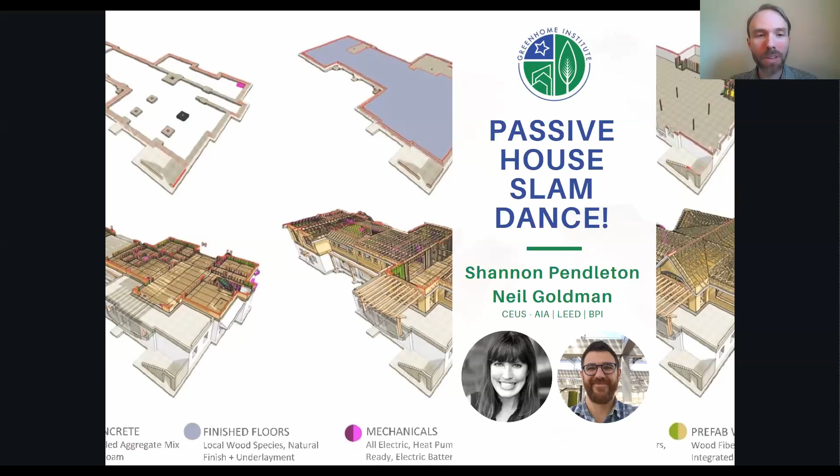Thank you so much for the introduction, Brett, and the opportunity to be here. I'm going to share my screen and get us started. Let me know if you can see that all right. Yep. Great, thank you. So, looks like my window moved.

There we go. I'm Shannon Pendleton, and I lead Passive House projects at Sanderson Sustainable Design in New Hope, PA. I'm excited to be here with Neil Goldman of Less Energy in Philadelphia, to talk about Passive House. We've both worked in this space in different roles for a long time. Currently, I do design, project management, owner's rep, and consultation. I'm an online host with Passive House Accelerators Construction Tech and the in-house Passive House consultant at Source 2050's High Performance Marketplace. I also volunteer a lot, which is a great way to get involved, most notably with Green Building United in Philadelphia, which is where Neil and I met. I'm also a proud GHI member.

So Neil has an amazing path too. Neil, you were at Kitchen and Associates when we met, is that right? Yeah, that was a while ago, but I was a HERS rater for Kitchen Associates, a larger architecture firm focused on affordable housing. So yeah, I did a lot of multifamily housing projects there.

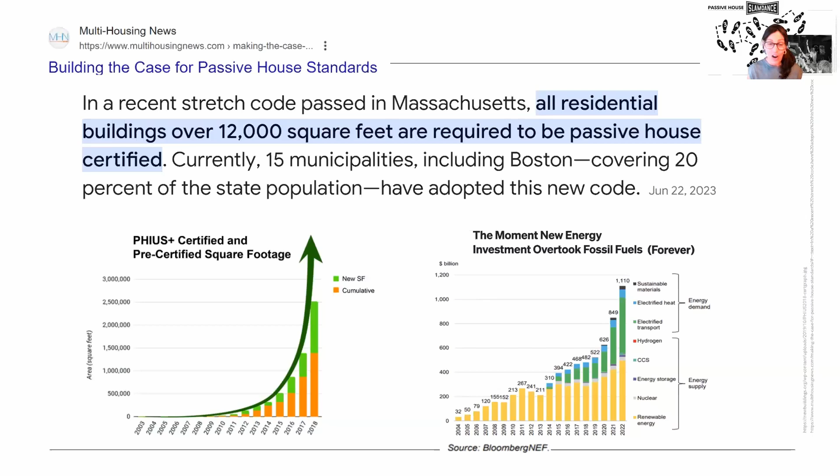Second, it helps to share that globally, passive house is either at the top of a step code on the path to zero energy, or at the base code on the path to zero carbon. Globally, there's over 12,000 certified projects and over 120,000 projects using the principles.

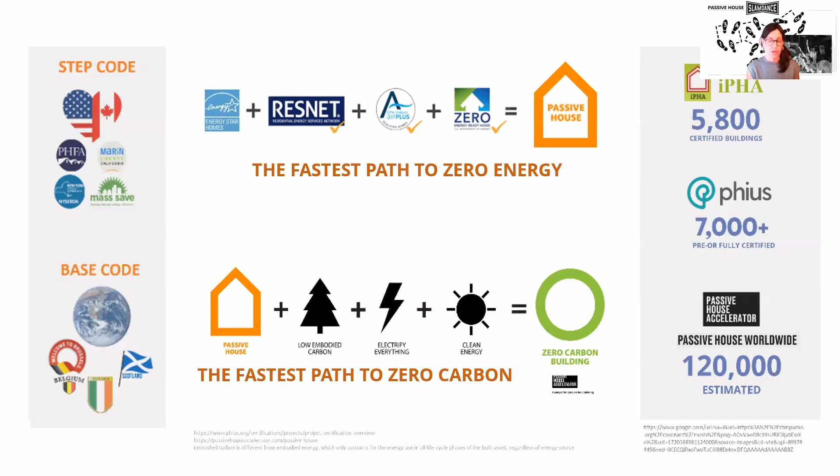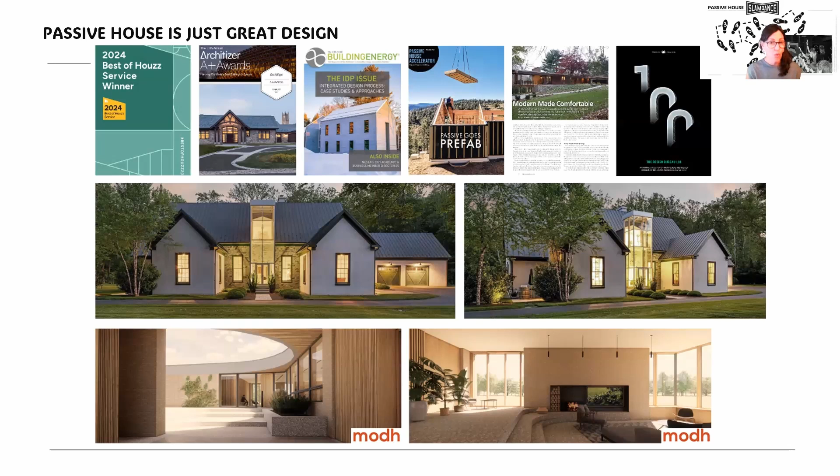But the most compelling thing you can do is show how passive house is just great design. In all of our work, our projects either use the principles or push for certification, or both. Any project can be a passive house, whether it's a retrofit, new construction, residential, commercial, high-rise, multifamily, or single family.

And if you're going to certify, you can do that with PHIUS, which is Passive House Institute US, or PHI, which is Passive House Institute. But both certifications really use 5 simple principles to yield 12 benefits and gain 70 to 90% less energy use, with a proven return on investment.

So we really like to focus on the health, safety, and welfare, and how passive house has the best indoor air quality and comfort of any building out there. It's very asthma friendly. It's noise canceling, so New Yorkers love it because it keeps the honking cars out. It's free of dust, bugs, drafts, and moisture.

It's all electric and off-grid friendly, and in many cases it's been proven to be wildfire smoke resistant. So when you're offering passive house to your clients, first figure out what they value and why passive house delivers that better than any other methodology or certification.

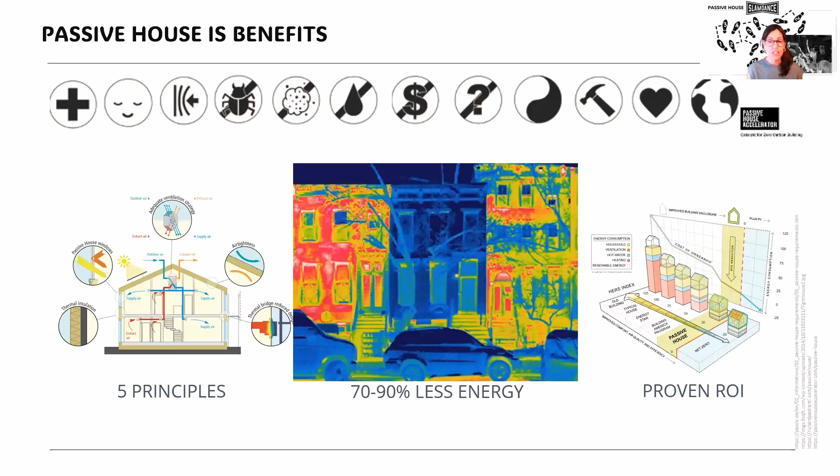As Michael Ingui of Passive House Accelerator says, nobody ever wants the house with the dust and the bugs and the drafts and the moisture. So that image in blue in the center of this slide is not a vacant building - it's a passive house seen through an infrared camera in winter, next to the ones that are letting all of the heat out.

Best of all, passive house focuses on how excellence is measured. It's not the architect or builder saying it's great - it's a third-party rater or verifier proving how the work measures up. So it's your client's best guarantee and insurance that they are going to get what they pay for.

So when you think about modeling your workflow and your proposal, think about it as a waltz. You're going to go through rounds of review with your team and the certification body as the project marches forward. Share and track your scope of work at every meeting, so your whole team knows what to expect and when to lead and when they're expected to follow or review.

Ideally, for certification, you'll register the project during schematic design, receive pre-certification on that design at the end of design development, and go for final certification during construction documentation and administration.

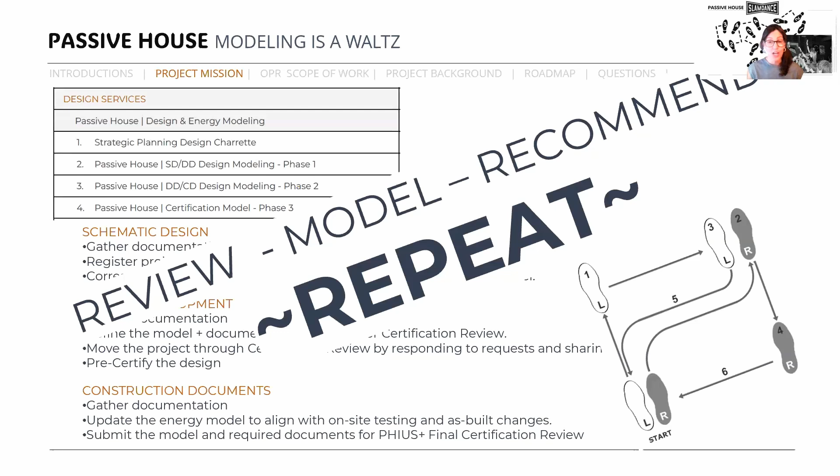Also, let your client know that other team members may be needed because Passive House is a team sport. At the very least, make sure your team has a CPHC or Passive House designer, a verifier, and a mechanical engineer. Often, if you're doing a residential project, you might not have a mechanical engineer, but you're going to need one if you do Passive House.

If your owner has a builder, ask them to include pre-construction services in that builder's scope of work so that they can get paid to join the design meetings. They are going to be critical for your sequencing conversations and in understanding what materials you want to specify.

Plan a great kickoff meeting and get everyone on your team to attend. During that kickoff, do introductions, review the project mission, all the Passive House requirements, your scope of work, and review the project documents you have to date. Share your initial design recommendations on the form factor and orientation. It also helps to have a roadmap and a schedule, share some similar case studies, and take questions.

We find our best practice is to pair an experienced member on the team with a newbie, either internally in your office or as a requirement of the RFP for professionals you want to add to the team. We also find that sweet spot for hosting that kickoff meeting is right at the end of schematic design.

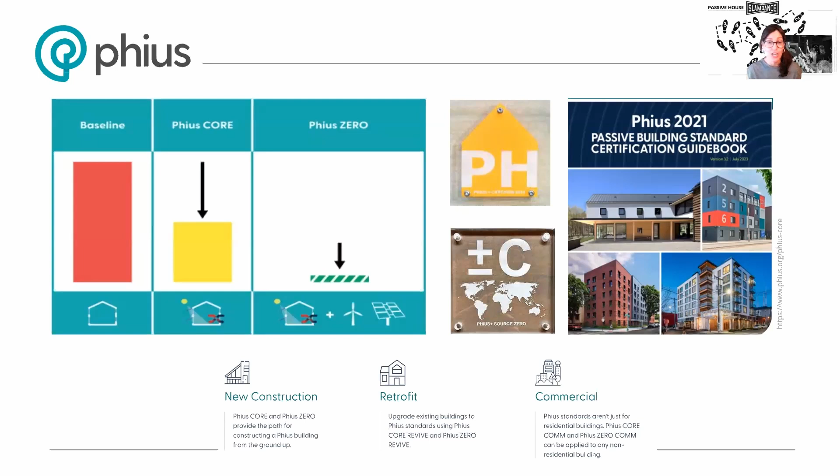We certify with PHIUS. They have two paths for certifying, Core and PHIUS Zero, and both of those lead to optimal results. For PHIUS Core, it's typically new construction, and it can follow either a prescriptive or a performance path. For PHIUS Zero, they combine Core's passive conservation limits on space conditioning, then add active conservation source energy targets for the user loads, like lighting, appliances, and mechanical systems. Then they add a layer of requirement for renewable energy, whether that's on-site or off-site generation, or sourcing your renewable energy from renewable resources.

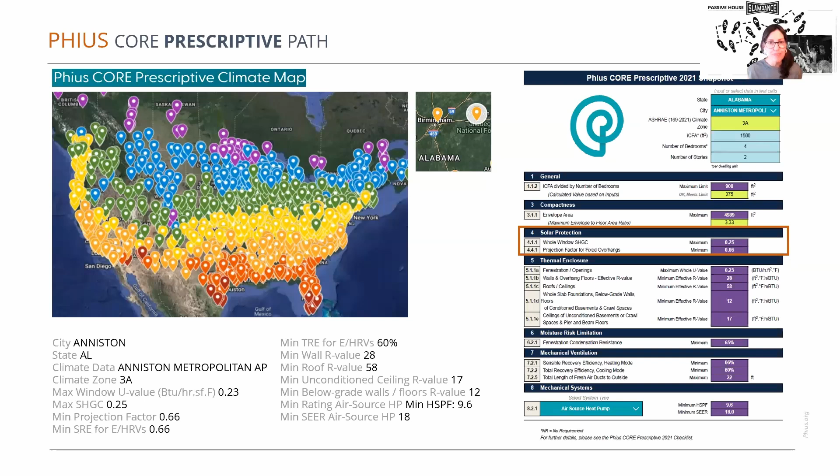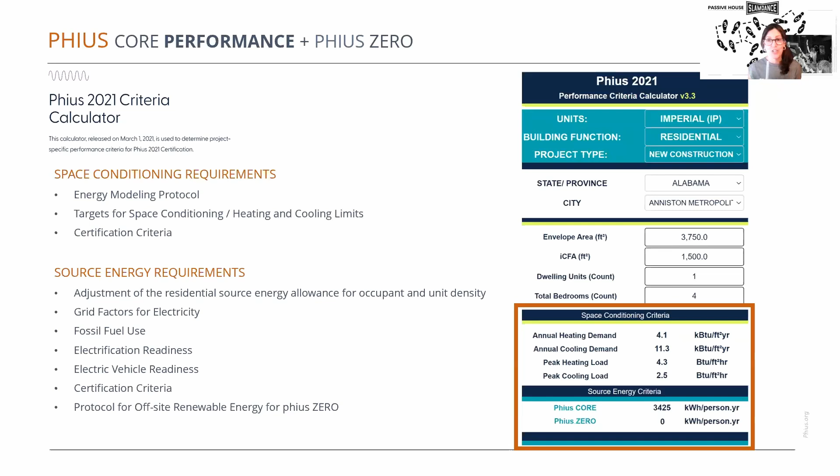For the core prescriptive path, it's pretty simple: you use PHIUS's climate map and calculators, and you set targets for R-values and system efficiencies. For the performance path, you chart a path to be renewable with the core limits on heating and cooling demands and peak loads, or you level up to PHIUS Zero. You can choose which one of those to hit with your team as you go through the process, and then get that net energy use on an annual basis.

So real quickly, we're going to jump into a couple case studies, and we can look at these more in depth later. But first, we're going to look at a project named Silver Green. It's a completed multifamily project, it was prefabricated, and it achieved Source Zero Passive House through PHIUS.

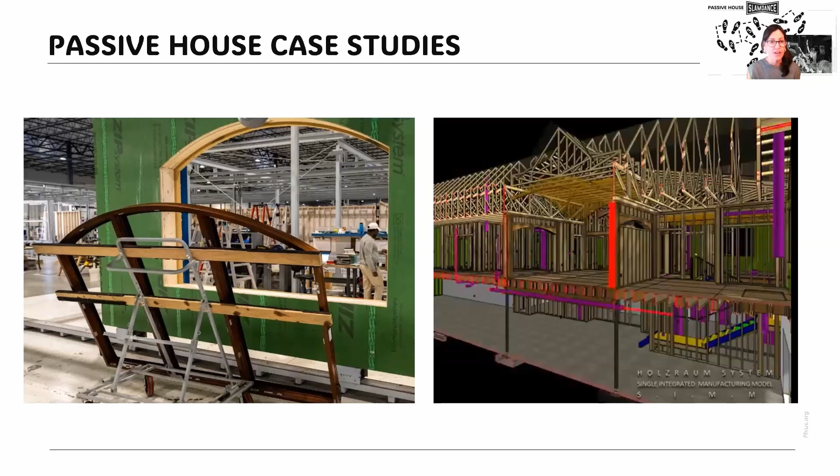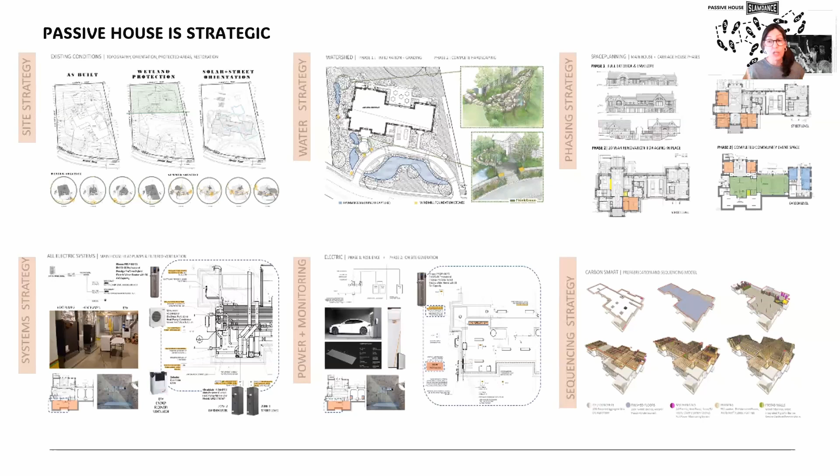Our client had multiple future goals that we had to make specific. So we started with narratives from all the team members and then put numeric targets on those narratives to measure our success. Some of the client goals included how to swap out systems in the future without damaging the passive house envelope, how to prepare for community solar, and a planned renovation after 20 years of occupancy to create an event space for the community. Those are just a few of the goals—there were many.

But we worked through all the assemblies and transitions in the envelope on the exterior.

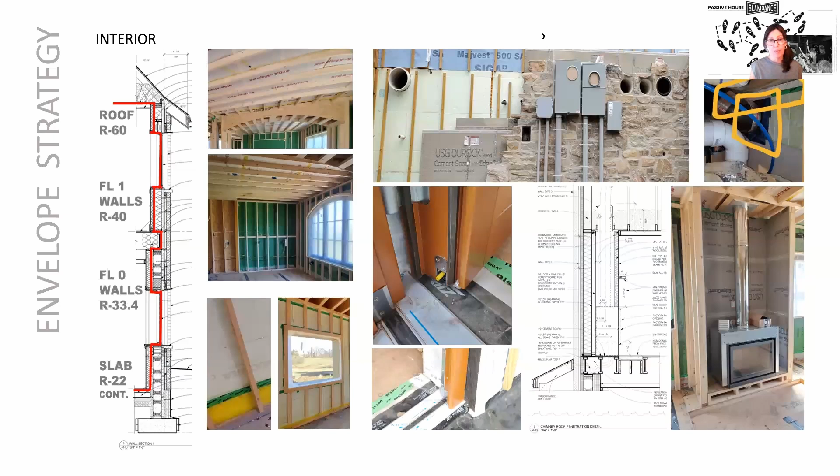We worked through all the assemblies and transitions in the envelope on the exterior, which included a full stone veneer and wood fiber insulation. And then on the interior, how those parts would go together, which included two airtight wood burning fireplaces, which required dedicated air intakes and exhausts in order to isolate them from the balanced airflows for heating, cooling, and ventilation on the passive house envelope.

So always review your air barrier strategy and any thermal bridges that you think you might run into in your building envelope. Put little circles around that full building section and say, hey, these look like they might pose a moisture risk. Let's talk about them and see if we can mitigate them.

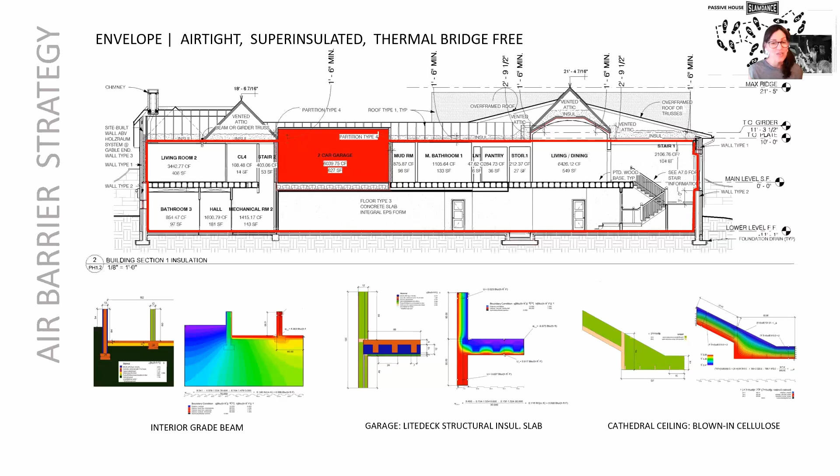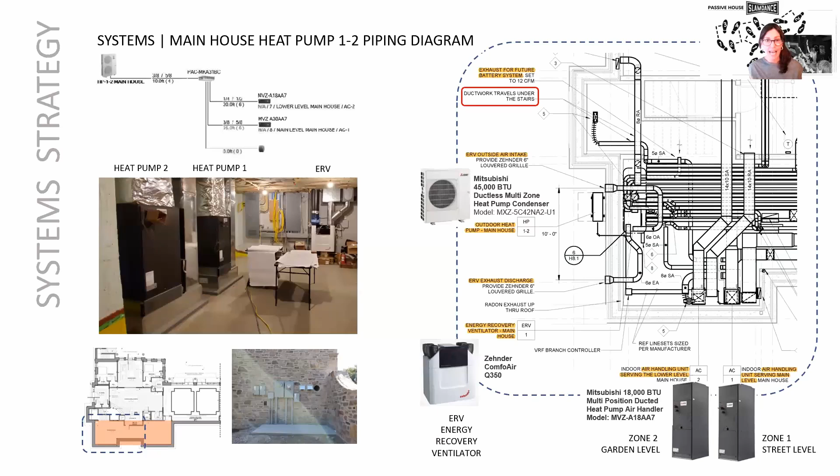As soon as your geometry is set, create a systems diagram. And if available, model those systems in 3D so that you can clash detect your ductwork. Always use gasketed penetrations if you can for easy future swap outs.

And have a power strategy for your current power and your future on-site generation. If you can, invest a few pennies to run conduit to your property lines, not just your roof and your shutoffs, for future solar. Then you can also be future-proofed for maybe community solar. So while you're digging up the earth, while you're building everything, it's just pennies on the dollar to run that conduit. And it makes it very easy to upgrade in the future without having to do any demolition.

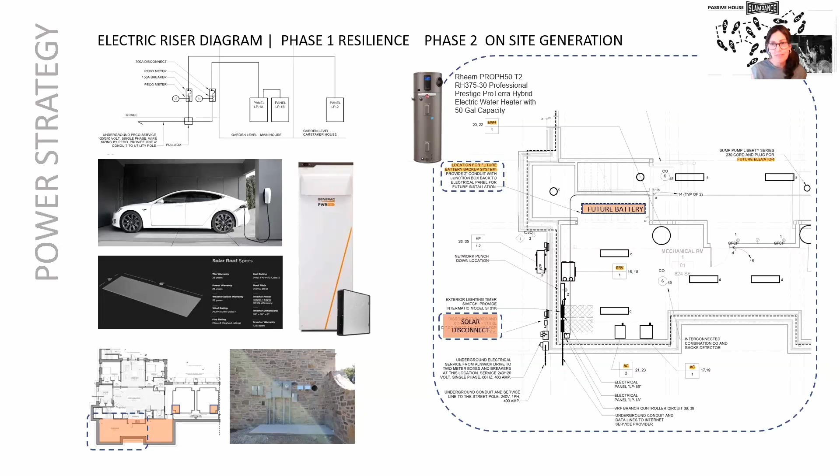The next case study I want to look at is called Kibunjah. It's a project Neil and I are working on together, and it's still under design. It's looking to achieve PHIUS Core or Source Zero Passive House certification.

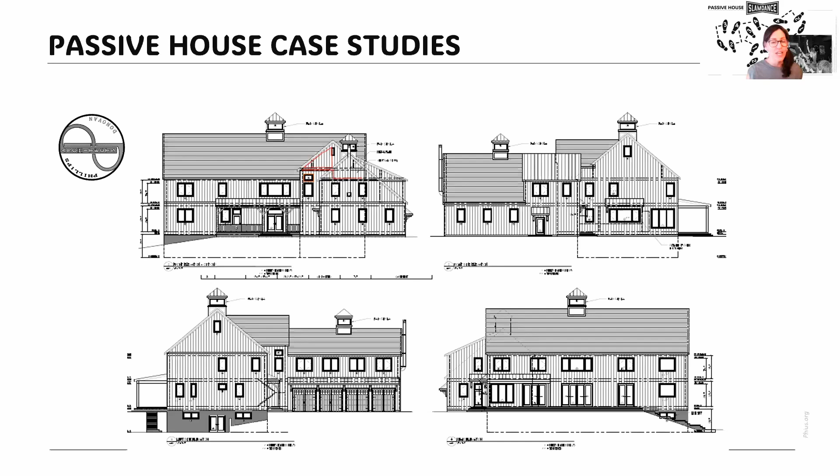So this is where we defined the climate set first. We picked our climate and looked at the orientation and site. We did an initial WUFI model with the design as is in schematic design.

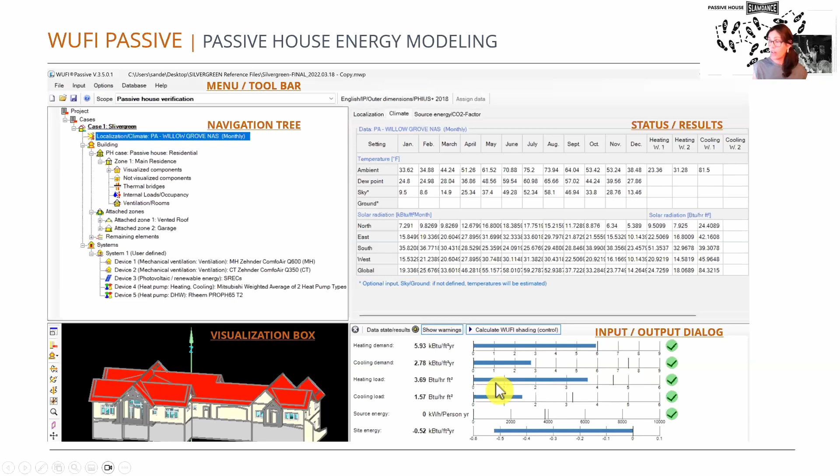And this was another little area where they had an outdoor balcony that was eroded from the form. So we said, hey, we think we can add square footage, reduce cost, and improve efficiency. So how about bringing these form areas out to the face of the facade?

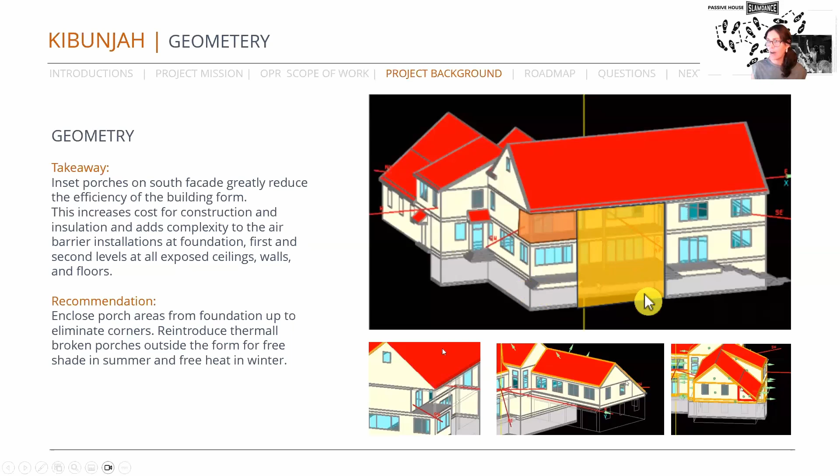And then we also showed how far we are just from PHIUS core, based on our source energy criteria. In our first model, we were about 5,600 kilowatt hours per person per year. In our second model, we brought that down to about 8 when it came time to deliver. That equates to about 15 400 watt solar panels. And if we wanted to go for zero, about 60 400 watt panels.

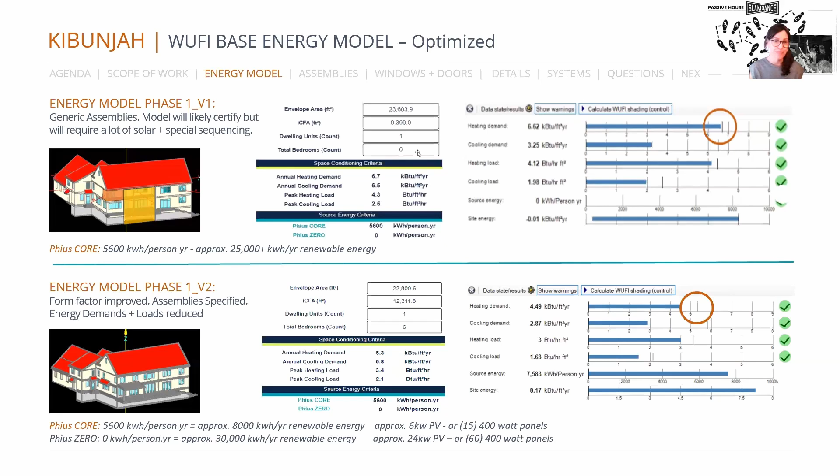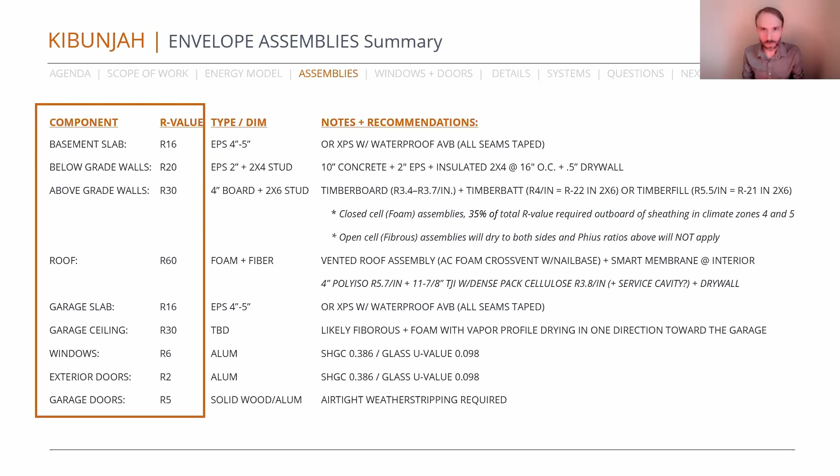Now, Shannon, do you see a benefit here? It looks like you've got some buffer built in, right? So you're going further below the requirements of the model. Is there a benefit to doing that, in the sense that perhaps you get through construction and it didn't shake out the way you hoped, something was a little less efficient? We hope the builders are going to do a great job and build it better, but we all know sometimes there's a deficiency. Is it good to have a buffer so that if there is a deficiency, you still make it? Is that part of the thinking too?

Absolutely. And I have never seen a project that went exactly as planned. You may meet your schedule, you may meet your budget, you may go under or over, but it will always be different than you planned. The Suez Canal gets blocked, your materials can't show up, you've got to substitute. Okay, what are you going to use? How thick is it going to be? And what's it going to do to your energy model?

So building in buffer, and telling the team where you're building in buffer while you're doing that energy modeling, is great, because it helps them understand, hey, if we have to squeeze the mechanicals because we can't afford them and use a lesser mechanical system, then our windows are going to protect us in this area. Everywhere you add buffer, you decrease the need somewhere else. And everywhere you increase the need somewhere else, you pull from the buffer. So it's like a big seesaw where this whole building system operates together in tandem.

So this is a quick summary of the envelope assemblies that we recommended. Initially, in orange here, we just recommended target R values with our base model. And then when we got more specific and started to build those assemblies out and layer them, and derate them for any structure that might be moving through the continuous insulation, et cetera, we put dimensions on them. And we started to name names and name materials so we could understand our vapor profile.

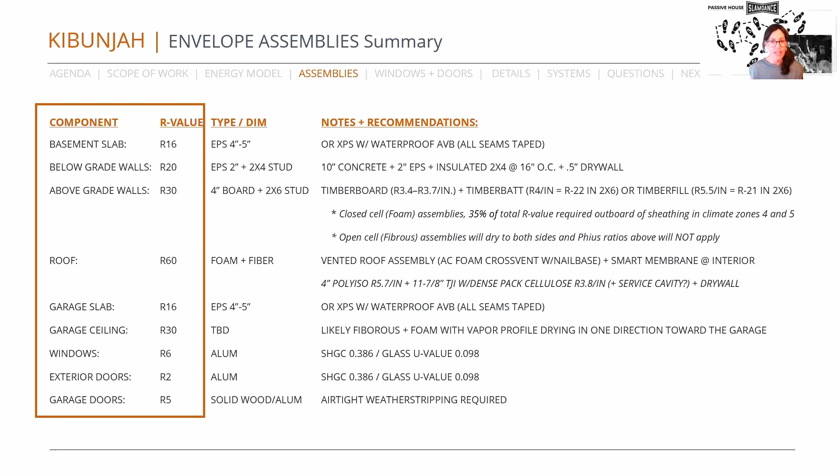Is our assembly going to dry out to both sides and be bidirectionally vapor open? Or is it only going to be able to dry out to one side because we're using a closed cell foam? And what does that do to certification? What rules will we have to follow if we go to a single vapor profile and we only dry out to one side? And have those discussions, because ultimately you want your team, when they leave this project, to do this again and feel comfortable knowing why they did what they did and how to go forward.

So for instance, on this project, here's a great example of highlighting that WUFI model on the slab, what that assembly looks like, what it looks like graphically in the model, and some of the product recommendations that we made for EPS, XPS foams, and air barriers below those, above that insulation, and below the slab.

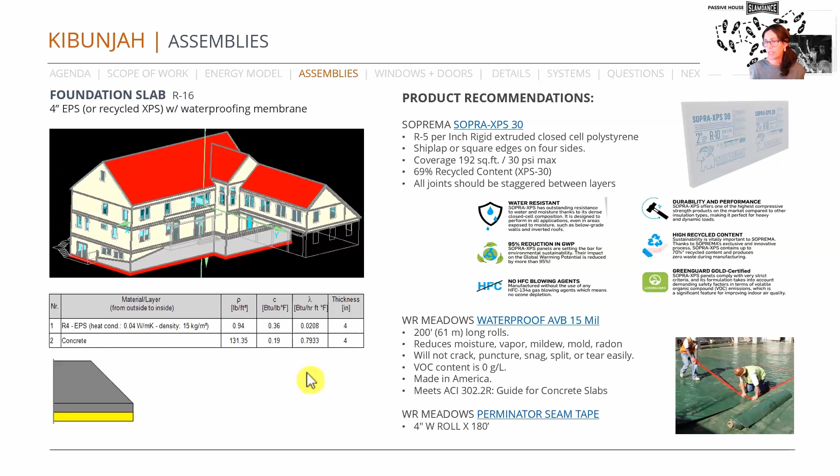That climate-friendly XPS and that mineral wool insulation on the interior of the slab, on the walls below grade, same kind of story.

So if you want to be vague and not name names, you can do that. But if you've got your builder on board, they usually have a supplier and they want to talk about that. So don't be afraid to have those conversations if they're appropriate. And don't be afraid to be general and just give target dimensions and R values and allow the builder to find those materials.

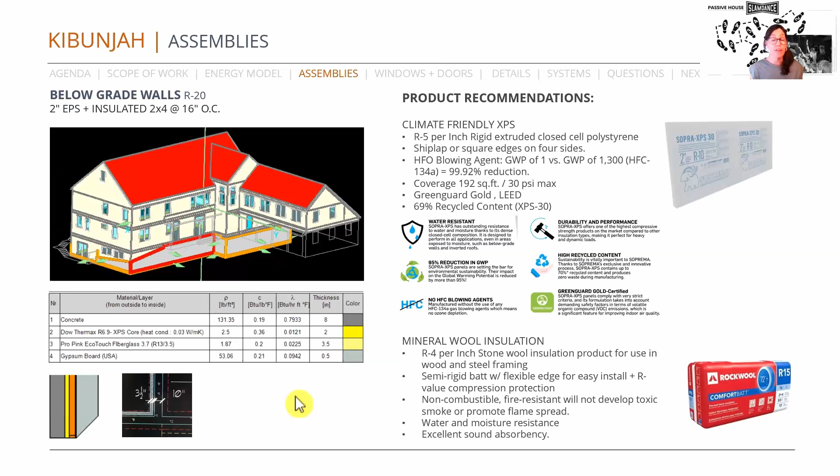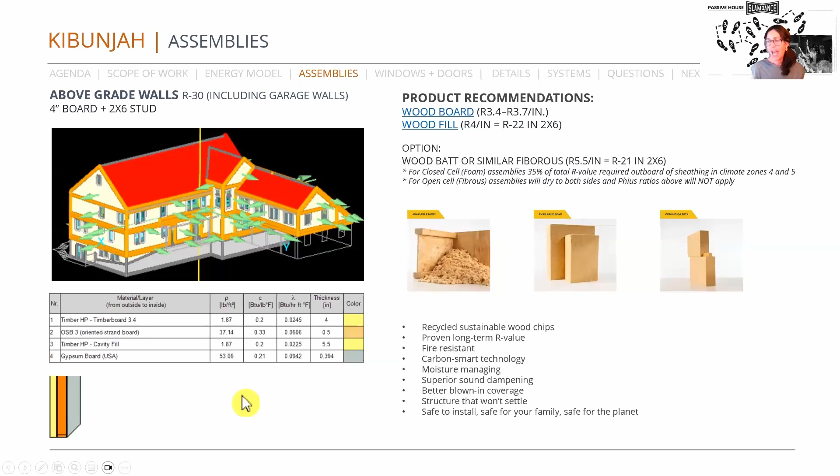For above grade walls, we looked at going bidirectionally vapor open and using wood fiber wherever possible. So we have a wood board, a wood fill, and the option for wood batt insulation in our assembly. And we're talking about long-term R value, fire resistance, carbon smart technologies, moisture management, sound dampening, and how insulation might settle in the structure, and where that might be okay in some assemblies and where it's not okay in others. And how much nicer it is to install a product like that.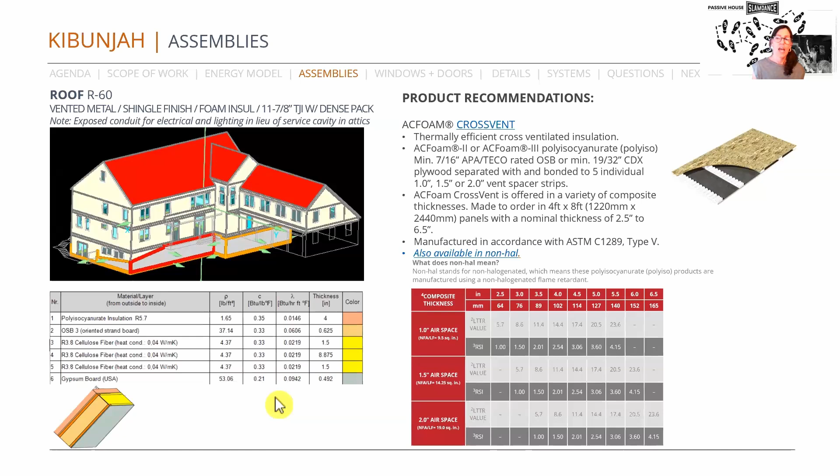For the roof, I should have highlighted it on this one, but you do see the assembly is shown here, and we're using a vented roof assembly. We talked about whether we wanted to use a vented or unvented assembly, and how a vented assembly would increase the warranty on the products.

For the windows and doors, we ran through 3 different manufacturers and talked about which ones might be more appropriate than others. We always like to use a pre-certified window unit because all the metrics are available for what we need in the model, like the U value of the mounted window, the frame factor, the U value of the glass alone, any solar heat gain coefficient to prevent overheating, or any shading needed on certain elevations at different times of year.

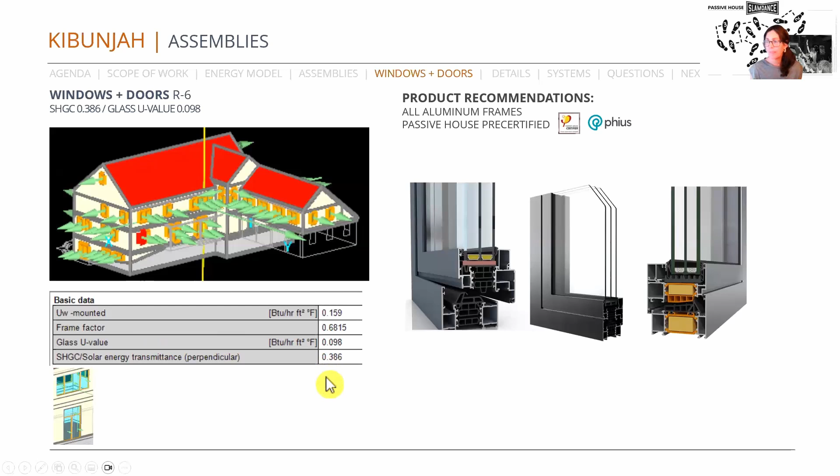Same goes for heating, cooling, and ventilation. We have a strategy. We block out what zones we're going to have, where we're going to put our mechanical rooms, and what kind of equipment we want to look at.

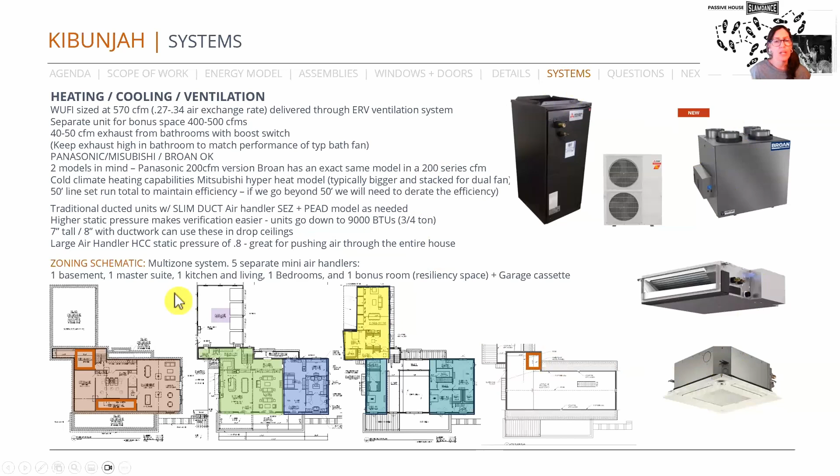For hot water, same story. Pick your appliances, talk about how you're going to do the layouts. For this house, it's a really big house. We talked about distributing vertically in 2 areas with 2 different zones and tying those together with a horizontal pipe with a shutoff, so that if one system goes down, you can open that valve, serve the whole house while you repair the system that's down, and not lose any functionality.

That was a great tip I got from a friend, Steve Baczek, on the Build Show. And everybody went, yeah, that's a great idea.

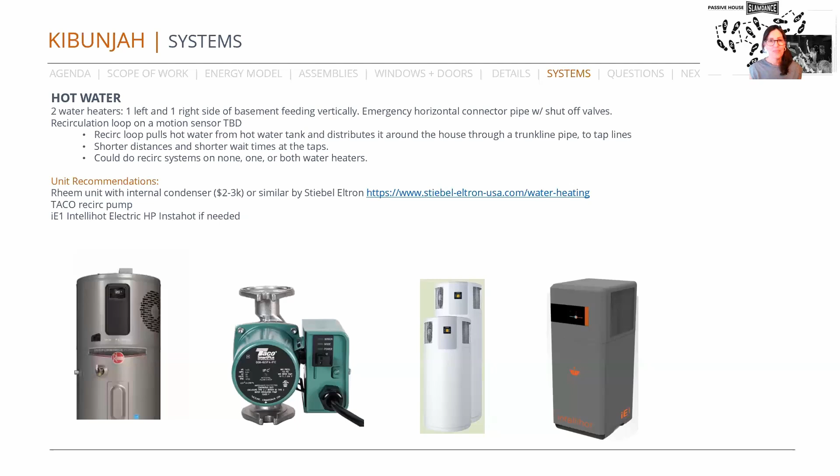Let's do that. So speaking of which, passive house is way better with friends. So have a buddy system. Don't be the only sole person on your team. Make sure you pair experience with someone new so that you get there faster, and share what you're doing in your community, volunteer, get involved and meet other people who are interested in what you're interested in.

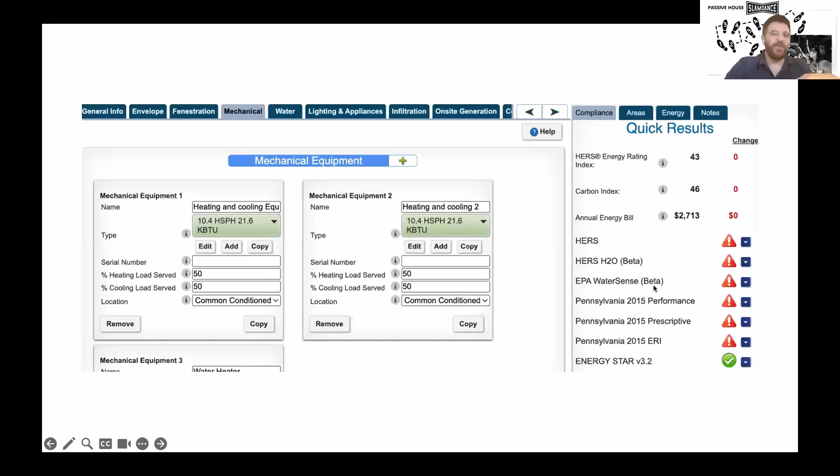This is what the HERS rating energy modeling software looks like. This is a screenshot from Ekotrope. So you could see there's all kinds of mechanical inputs up at the top. There's envelope and fenestration - all that information goes in here, and then it spits out the information about the energy bill, and then all of the compliance for a specific project.

So Passive House has a lot of individual requirements that you've heard of, and they also have a lot of requirements that come from other programs. So you can see on this tree, and this is from the Passive House website, Passive House, as you go up this tree, incorporates all of the programs below it. So, you know, if you're going to get Energy Star certified, you're definitely going to have code compliance, right? And you can see the HERS score here. Quickly, a HERS score - 100 is typically around code, and 0 is net zero. So as the score goes down, you're using less energy.

Energy Star is sort of the baseline program. There's a lot of requirements - 5 pages of checklist requirements, and a lot goes into that. It's a great basis for starting your energy efficiency path.

Indoor Air Plus adds a lot of requirements for a healthy home. As your home gets more and more airtight, they want to make sure that there's less pollutants and less risk in the home. So Indoor Air Plus is a lot about the environment inside the house. And then Zero Energy Ready - you need to get Indoor Air Plus and Energy Star certified, and they add a certain amount of requirements on top of that.

And then we go into PHIUS, which requires that you get Zero Energy Ready certified, which kind of goes down the line. As you can see, this is a screenshot from the quality assurance workbook for PHIUS. On the right here, you can see where all these different requirements are coming from. So Energy Star requires 50 CFM intermittent air, but Passive House requires that you supply fresh air from the ERV to all bedrooms, which Energy Star does not. This goes throughout the quality assurance workbook, and there are many requirements from all the different programs.

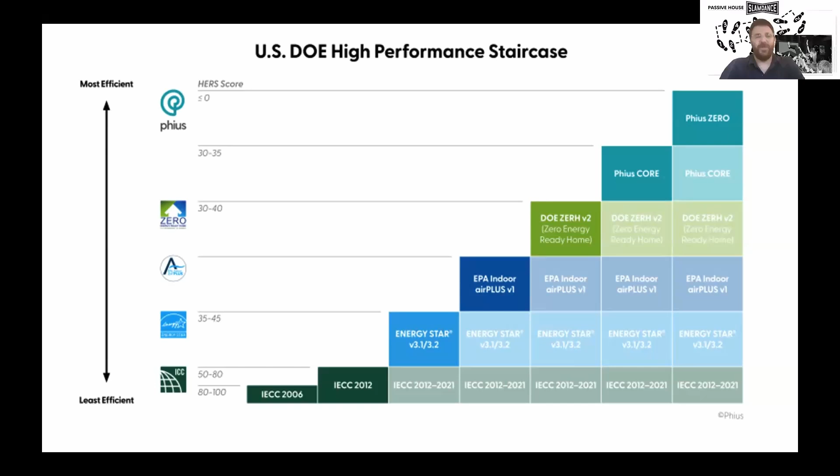Right, thanks, I hope that helped. So we talked briefly about this, but this goes throughout the entire PHIUS certification. Every piece of it sort of builds from different programs.

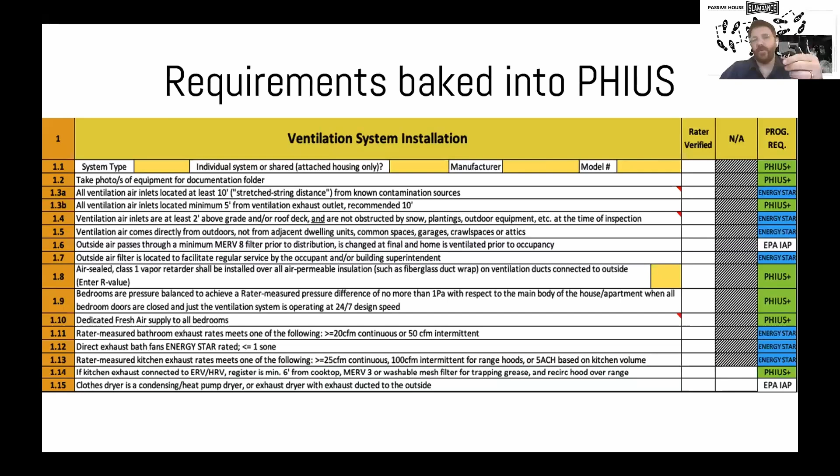Okay, so Indoor airPLUS is not a program a lot of people are familiar with. Indoor air quality, the Indoor airPLUS certification, has a big section on moisture control. They're very concerned that once you have an airtight house, you don't want any mold risk. So they make sure that you are flashing your roof connections properly, that you're flashing your window connections to the wall properly, that you're connecting the ground to kick-out flashing at the bottom where the two different materials may meet. They want to make sure the drainage plane of the house is complete, thought about, and working properly, so that the gutters drain away from the house and there's no chance of picking up bulk water from anywhere.

If you're in an area that is a radon zone higher than 1, it's interesting, in Pennsylvania, in Philadelphia, there's no radon requirement, but anywhere outside of Philadelphia, you immediately have to do radon mitigation. So we're used to this, and you either have to pull radon from under the slab, or have a method for getting rid of the radon away from your house if you're in the proper zone.

For HVAC systems, they add a lot of requirements, like you need to seal up the HVAC systems from getting dusty during construction. This is a common requirement in LEED, but this adds this here too. There's ventilation requirements for when you go to commission the house—you need to ventilate it for a certain amount of time. So you want to make sure you look into those requirements. The rater will bring those up in the meetings and during the process, but there are a lot of small requirements that get added with this Indoor airPLUS.

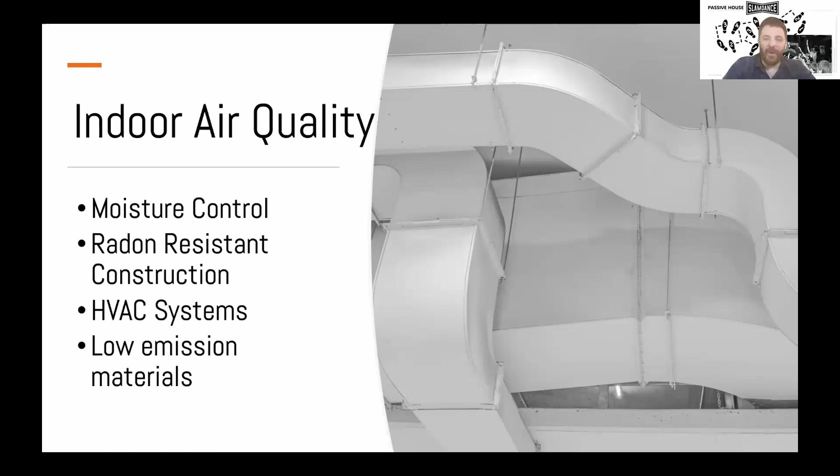The last big section of that is low emission materials. You want to watch out for any formaldehyde in your cabinetry or carpeting or paint and sealants, and they're very specific about which ones can be used. This one's gotten a little easier over time, as a lot of that has become commonplace, but you still want to look out for it.

High efficiency equipment types—there are a lot of different equipment types, right? You can go all electric or fuel burning. As I mentioned before, you could get away with a fuel burning appliance in an Energy Star house. But once you start moving up that ladder and you get more and more efficient, more airtight, and the requirements get tighter, you really need to go all electric.

For heating and cooling systems, there are really 2 types—well, there's only one type, right? There's a heat pump, because you need to do cooling. So heat pumps come in all different shapes and sizes. You can get a vertical or horizontal mounted ducted heat pump that forms and acts a lot like a typical furnace in a house—people are more familiar with this ducted system. And then there's split systems, so non-ducted mini splits.

You typically hear them, and these days there are all different types of split systems. You could have wall mounted, ceiling mounted, floor mounted, radiant floor systems. And then you could have one condenser that supplies 5 heads inside, or you could have one head to one condenser and have a bunch of condensers. So there's a lot that goes into a split system. And then there are electric boilers and heat pump boilers that you could do a hydronic distribution system with in a house. I'll talk a little bit more about that.

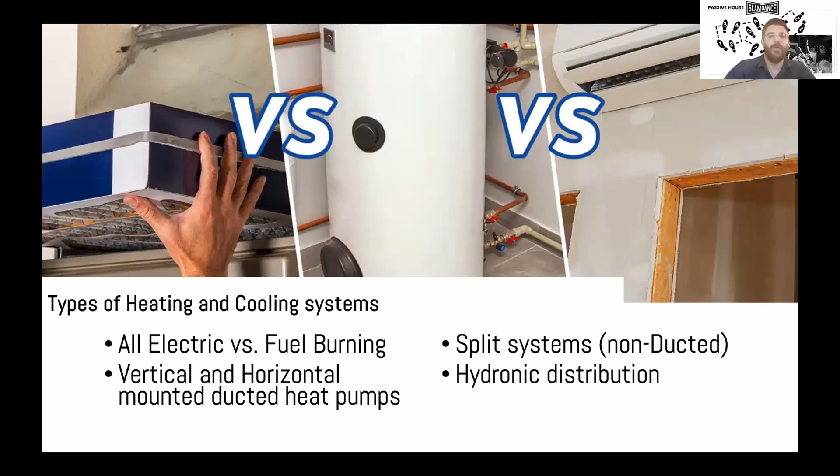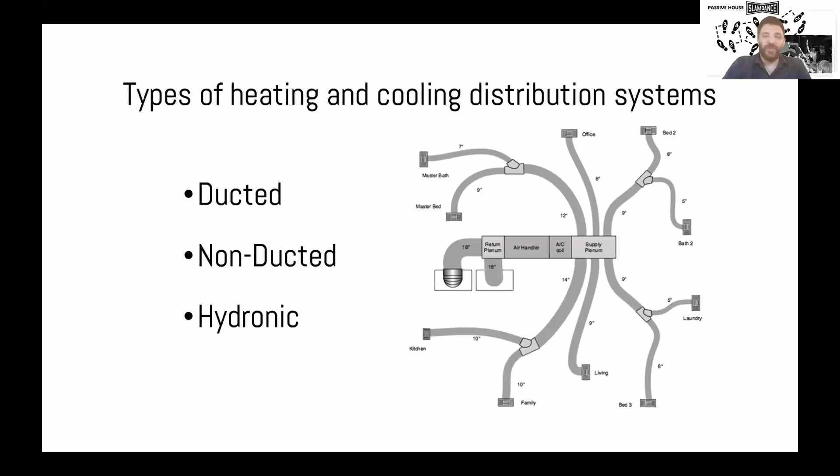You're going to go to a heat pump when you go to a more efficient house. So the decision becomes, are you going to do a ducted, non-ducted, or a hydronic system? There are a lot of pros with a ducted system—it's a centralized system. In a smaller house, you may only have one system, maybe 2. And so you only have one fan and one coil and one refrigerant line to manage.

You don't have to worry as much about leaks. There's typically less filters to change. And this is a lot more common, so you're going to find HVAC contractors that are more familiar with installing ductwork and doing it as common practice.

However, big cons with ductwork—it's large. You need to find and plan for spaces, chases, soffits, all kinds of stuff moving through the building to be able to fit that ductwork in there. A rater has to do the duct testing, and there is a lot that goes into making an airtight duct. If the contractor isn't familiar, they have to do a lot of mastic-ing before they even put the thing up in the air, because they often hide a seam or something. And then I'm going to come and test it, and those requirements are really tight.

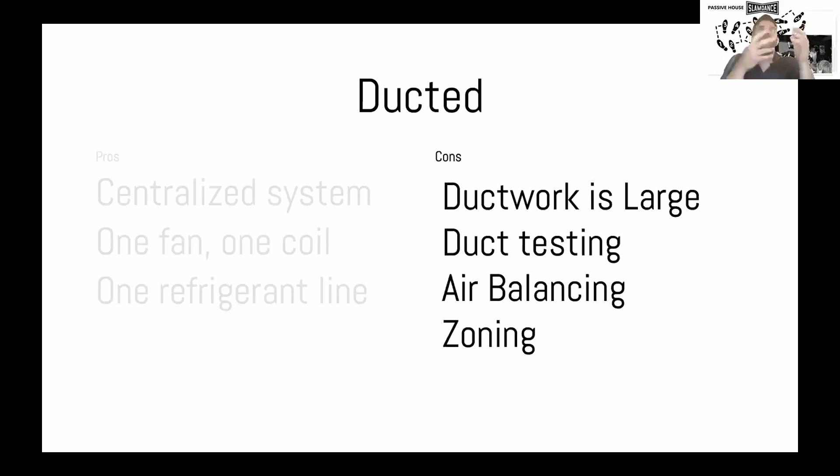That also comes with air balancing, right? Passive house has very tight requirements for supplying air to different rooms. And if the ductwork isn't done well with dampers and designed to be balanced with the right registers or other methods, it becomes very difficult to meet passive house balancing requirements. Ducted systems, while they can be zoned, usually only get zoned like upstairs or downstairs. So there's a little bit of zoning, but it's not as dialed in as a non-ducted system.

So when it comes to a non-ducted system, as I just mentioned zoning, you could put one head in every room and cool just the room you're in while the rest of the house stays warm. So there's a lot of zoning benefits to having individual systems.

Retrofits are great for this because you don't need to run ductwork. As we just said, ductwork is big and there's lots of soffits. You could typically squeeze a refrigerant line, which in some of these systems can be quite small, through an inch wide pipe. That's a big benefit when you don't have a lot of room.

Same idea with those soffits - you don't have to run ductwork, so you don't have to make spaces smaller or take corners for vertical pathways. Much easier to install, right? You can just pop it on the wall. This goes back to the same idea that there's not a lot of ductwork to run.

They're often just mounted on the wall, or in a new construction situation, in the floor system, or sort of looks like a radiator. These can be great for small spaces because a ducted system can only pull back so much - the capacity of it is what it is. Whereas with some of these systems, you could get much smaller capacity into the room and really make sure the capacity for that system is correct.

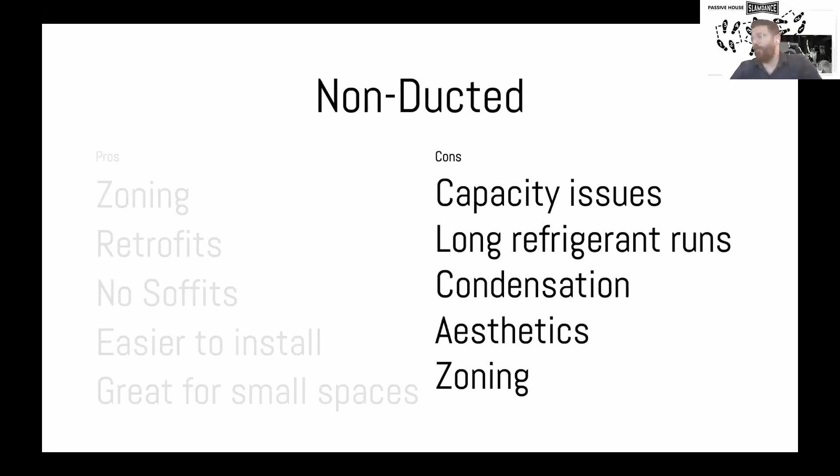Some of the other cons: long refrigerant lines. It's nice to have all these refrigerant lines running where you want without ductwork, but at the same time, more refrigerant lines create more refrigerant, more potential for leaking, and more connections. So that's always a consideration.

These things need to be able to get condensation away from them. So if you need to run a condensation pipe through the wall, or with a pump, it's always a consideration if it's below where the drain is and you need to pump it up, or if it's too long of a run, you may need to run a new drain through the house to deal with the condensation.

There's aesthetics that are a consideration as well. You want to make sure it looks good, and these things are on the wall or in the ceiling and you're always going to see them, whereas a register from ductwork can end up looking much nicer. And I honestly think I made a mistake putting zoning on the end of this, because zoning is definitely a plus for this one.

Yeah, I was wondering about that. But real quick, Neil, two quick questions for you on what you're seeing out there with ducted versus non-ducted. I was just the other day anecdotally looking at a LEED for Homes preliminary plan review rating. They originally had a ducted air source heat pump, and then they switched it to mini splits, and all of a sudden the HERS rating just dropped, right? And for those who don't know, that's a good thing - better HERS rating. So anecdotally, are you seeing large drops when you make switches like that? Are you guiding people on that, or what are you seeing out there?

I don't see people change very often, honestly. That's an interesting point, I wonder if that was rare too. I know, yeah.

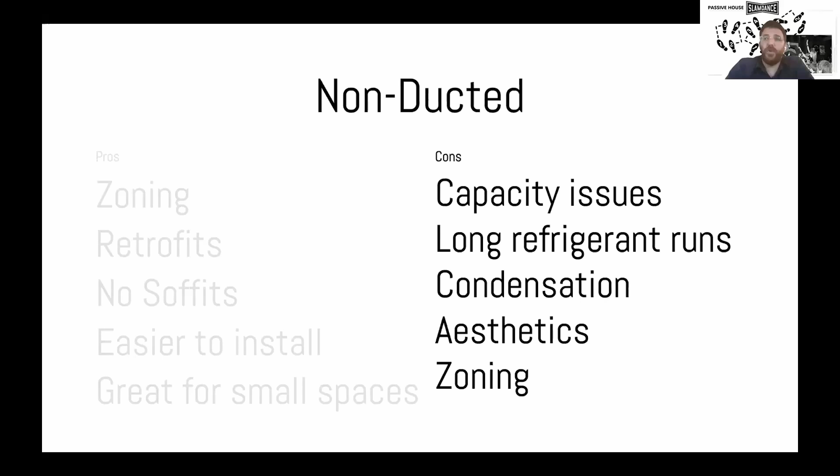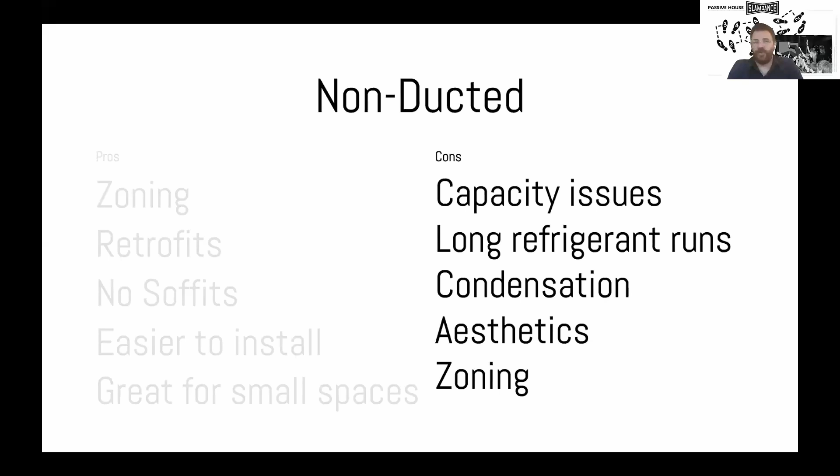I haven't heard that. I think it depends on how you operate your house. It's always a problem when these systems run too short a cycle. When you have a lot of capacity in a small room, it won't run long enough - it's like the short cycle problem, and it won't pull humidity out. I could see that being a problem, if the room's cooling down really quickly but not pulling the humidity out.

There is a hydronic option. You could have an electric heat pump boiler providing warm water running through radiators, radiant floor systems, or even a fan coil system. These systems can be really energy efficient because their delivery system is very efficient. You can combine them with hot water - you could have a tank, or if the load is small enough, use a heat pump hot water heater as your boiler and store it in a different tank and pump it around. No air filters to worry about because it's all coming from the radiant. And plumbers are used to installing boiler systems, so it's an easy thing to find an installer for.

Now I have a question mark after no cooling, because I've heard there are systems coming over from Europe that have cooling in them - a heat pump boiler that could chill the water, deliver it to a fan coil unit that's like a mini split in the room, and cool the room as well. I'd love to see a system like that, but I don't think it's very common. So a big con of this hydronic system is no cooling, and depending on the house, it's tough to retrofit a radiant floor - you'd often need radiators around the house, which take up space and look a little weird.

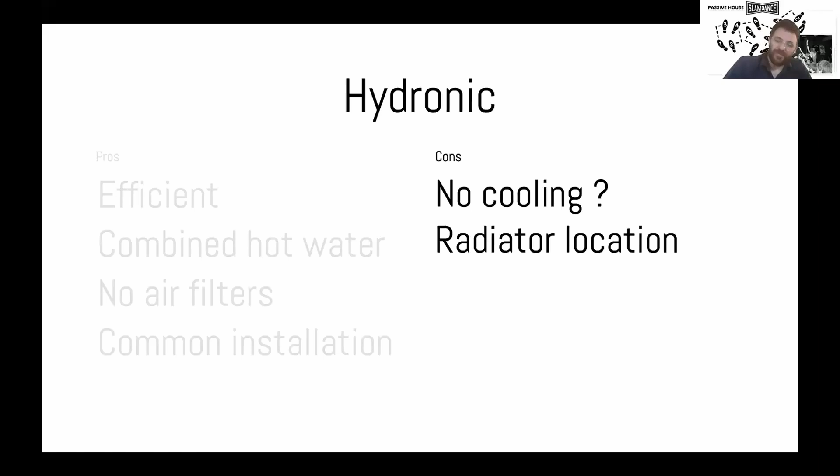I wanted to mention some program requirements that are often a little tricky for people. You need to pressure balance the rooms with respect to the rest of the house - there needs to be a transfer grill from a bedroom, a return grill, or an undercut door. This is always a problem, even with a mini split on the wall, because you're supplying ventilation air to the room, so you're pressurizing it, and you can't over pressurize it.

Make sure you're pulling all your exhaust from kitchens and bathrooms. It's a requirement that intake and exhaust be more than 10 feet apart. This is common but sometimes gets forgotten and is difficult in the field. As suggested, it's great when you do a 3D drawing of all your ductwork - it gets planned out, but often in the field, you're in a mechanical room going out one side of the house with another floor, and it gets difficult. So be careful with that one and plan for it.

Filtration minimum - this seems simple, but you have to make sure the system has a large enough filter to meet the requirement, which is MERV 13, and account for the static pressure loss. The engineer needs to make sure they put the right filter in at the beginning - you can't just switch the filter out at the end.

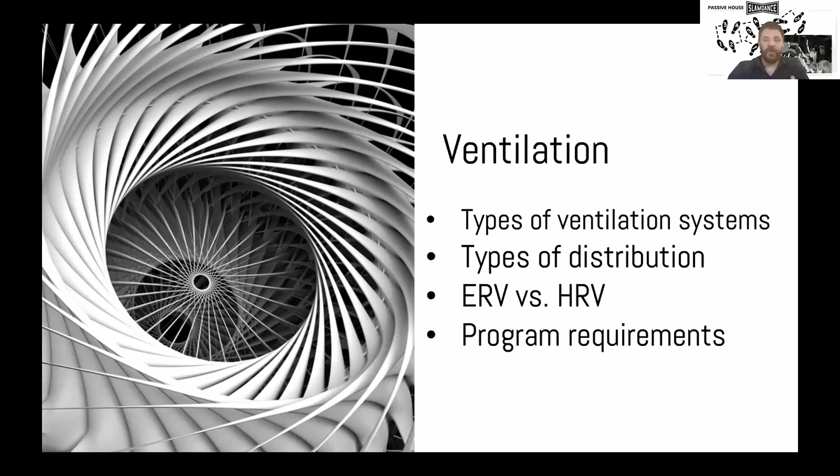I would do the same thing for ventilation, different types of ventilation systems, different types of distribution. ERV versus HRV is always a big one, and then a few more program requirements based on ventilation. So there are 4 types of ventilation.

Exhaust only is very common in the Northeast. Where I am, that's typically how most builders doing an Energy Star project work. This is where they typically have an exhaust fan from the bathroom exhausting air at the right rate so that air is being pulled into the house from that exhaust fan. You get your ventilation. Supply only is better.

It's the same idea. It's often a supply fan pulling air from the outside and dumping it into the return of the system so that air gets conditioned. I wouldn't suggest this typically in a colder climate. This is good in a warmer climate because you don't want to be pulling in cold air from outside, as it could cause condensation problems.

And then what is required for a passive house? Well, natural ventilation is where you are able to open windows and just naturally ventilate the building. This actually goes into the owner's model. You can say the owner naturally ventilates, and it could be included, and it will get modeled that way.

But balanced ventilation is typically how it's required in a passive house. This is where you're bringing in air and exhausting air at the same time so that the air flow is balanced.

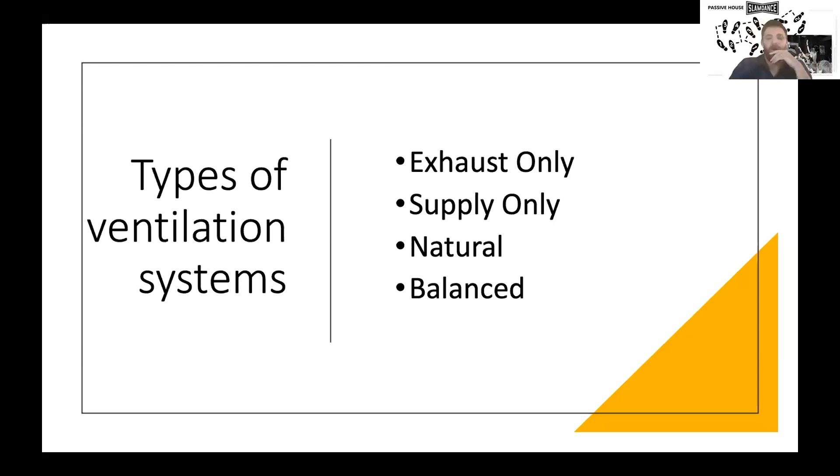Different types of heat recovery systems - this is where you have balanced ventilation, and you want to recover the heat from the airflow. So that's what an ERV is, energy recovery ventilator. The difference between an ERV and an HRV is the ERV is able to pick up humidity, which is important in the right climates, as it is in the Northeast. HRVs can probably be used in a drier climate, but I've actually never seen one, since I'm always in the Northeast.

There's a lot of different types of ERVs - there's a wheel, there's a core, and you could even have a medium that picks up humidity and temperature. But I wanted to talk about active and passive systems, as lately I've been seeing a lot more of these active ERV systems that use the air conditioner and heat pump cycle to help with ERV efficiency. I don't know if you guys have heard of a package system that does heating, cooling, and ventilating, but they're able to use the heating and cooling system to increase the efficiency of the ERV.

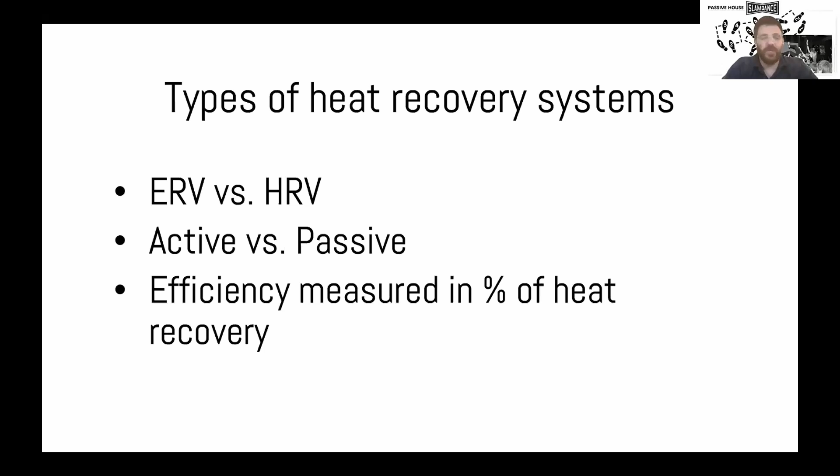I just want to mention that ERV is measured in percent of heat recovery. We typically see around 75 to 85% recovery in a passive house, so you want to look out for that.

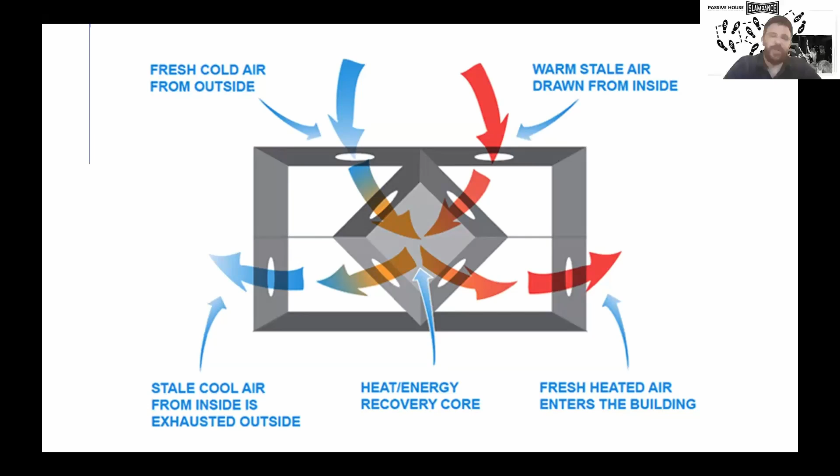This is a quick diagram of how a core ERV would work, one with a core. There are two fans in here, one blowing the air one way, one blowing the air the other way. It's pulling air from the kitchens and bathrooms and wherever else there might be a pollutant, and exchanging that outgoing air with incoming air that is fresh from outside, delivered typically to the bedrooms of the house and sometimes the living spaces. That exchange is able to exchange the heat going in and out of the house.

There are typically two different kinds of distribution systems for an ERV system. There's a centralized home run system where there's one big ERV with a manifold that runs supply air to each place it's supplying, and goes right back to the system. So sort of like a manifold system for plumbing, you can dial in each branch that is going to each room, making balancing very simple and making testing and install simple, because typically the ductwork is much smaller.

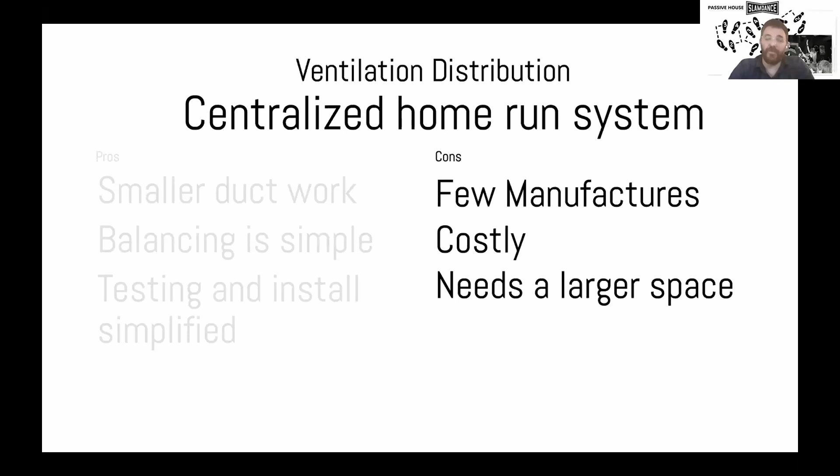You use 3-inch flexible ductwork that can be run around through the whole house instead of having to knock together all of the square or round regular ductwork. The problem is there are maybe only 1 or 2 companies that make it, and it can be quite expensive. It also needs a big space. In my experience, these are larger and need a dedicated room, whereas I often see the other type of ducted ventilation systems put in a closet, kind of thin and small, as we saw in some of those photos in the beginning.

Some of the pros of a traditionally ducted ventilation system: the whole thing is hard piped all the way through, like a regular HVAC system. For a passive house, you need to supply all the air to the bedrooms, but in an Energy Star or Zero Energy Ready home, you could dump that supply air into the HVAC system to be conditioned. They're familiar to local installers, so a lot of HVAC contractors can install these types of systems, and they're much easier because they're traditionally ducted.

There are a lot more people making these types of ERVs, much simpler because they don't have the manifold, and it can be integrated into the HVAC distribution. They can be controlled by the HVAC system, so if it's running, it may tell the ERV to run, or vice versa. When the ERV runs for a third of an hour, it tells the HVAC system to turn on as well and condition that air that it's dumping into the return.

Balancing is a big deal in passive house, and I've brought it up several times, but these types of systems can be difficult to balance. I've experienced a lot of heartache in the field having to install dampers later or install different types of registers. They make self-balancing registers that are a little better, but it can all be quite difficult towards the end.

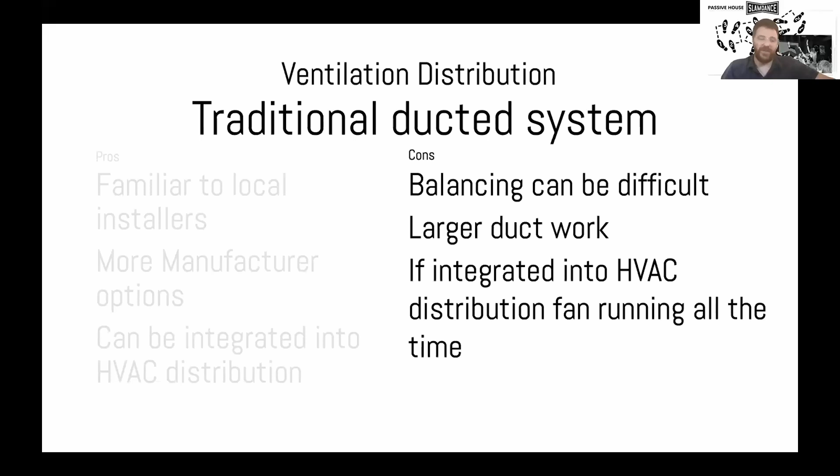Larger ductwork - like I said, the manifold system type has 3-inch ductwork, but these are going to have 4 to 6-inch ductwork and be larger and more expensive to install. Sometimes they require the HVAC system to run a lot more than it normally would because it's using that system to distribute the air.

I just quickly wanted to talk about these packaged magic box systems that are becoming more popular, as I mentioned. They can be really good for small projects because you install this one ducted system and that's it - there's only one distribution system, not a separate ventilation and cooling or heating and cooling system. They use the ventilation air to pull in outside air to cool or heat the coil down, so they don't need an outside compressor, which can help a lot with outdoor space. Because they have these active heat recovery systems, they can be very efficient at heat recovery.

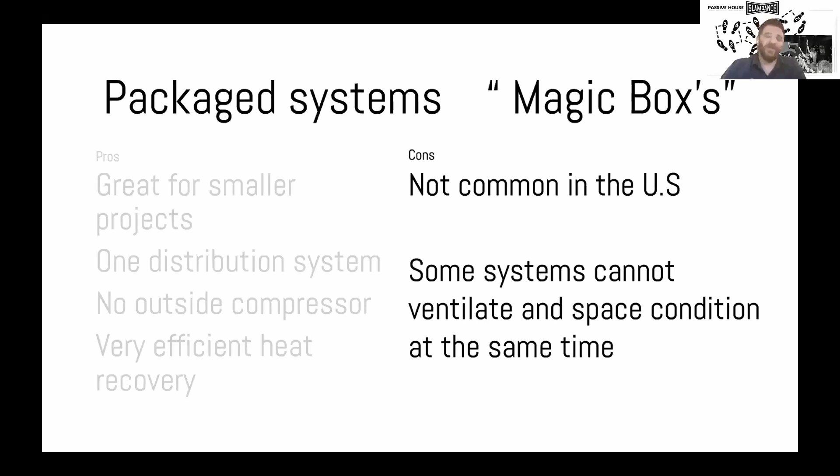Again, not a very common system, unfortunately - I've only seen a few. You can get them, but there are longer lead times and they're not as common. They also have some constraints where they won't be able to do all the things individual systems can do at the same time. It uses the ventilation air as the compressor, but it can't ventilate and condition the space at the same time, so it's sort of switching back and forth sometimes.

This is a slide I've seen already. So quickly about lighting and domestic appliance requirements.

For a passive house, 80% of the lighting needs to be Energy Star qualified, which can hinder some lighting selections. All appliances - dishwashers, refrigerators, washers and dryers - all need to be Energy Star certified. And the hot water system needs to be efficient in delivery. I measure how much hot water comes out of the furthest tap from the hot water system, and it needs to raise 10 degrees before a half a gallon of water comes out. So it definitely needs to be thought about and planned as an efficient system so that you're not waiting forever for hot water to come out.

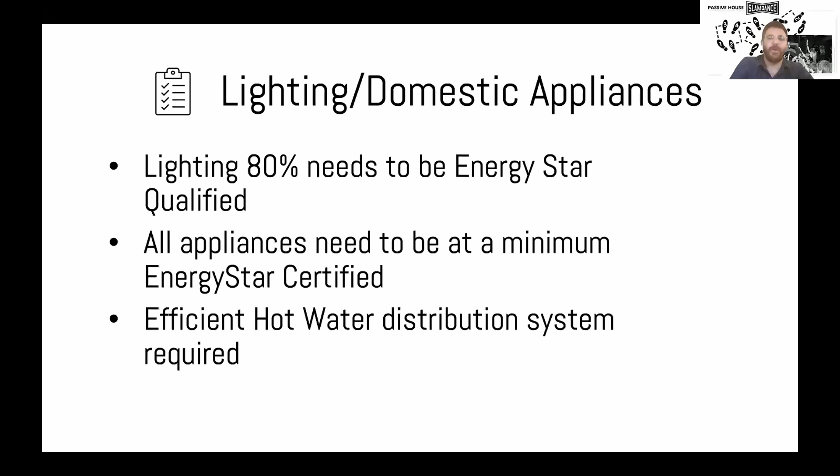Once the design gets put together, I'll do a review and make sure all the requirements not only are thought about, but end up in the document so that at the end, the builder understands their responsibilities.

Once the process gets started, I do a pre-construction meeting, whether it's an Energy Star project or a PHIUS project. I want to make sure anybody installing anything related to the certification is at this meeting.

We all sit around and talk about who is going to be doing the air sealing around the electric wire penetrations that the electrician's going to make. Sometimes it's the electrician, sometimes it's a separate air barrier installer. So you just want to hammer those things out.

The ventilation ductwork needs to pass through here, but the HVAC guy thought he was going to use that for his trunk duct. So you have to make sure all those things are coordinated, and you go over the timeline and all the different trade responsibilities. It's really important meeting.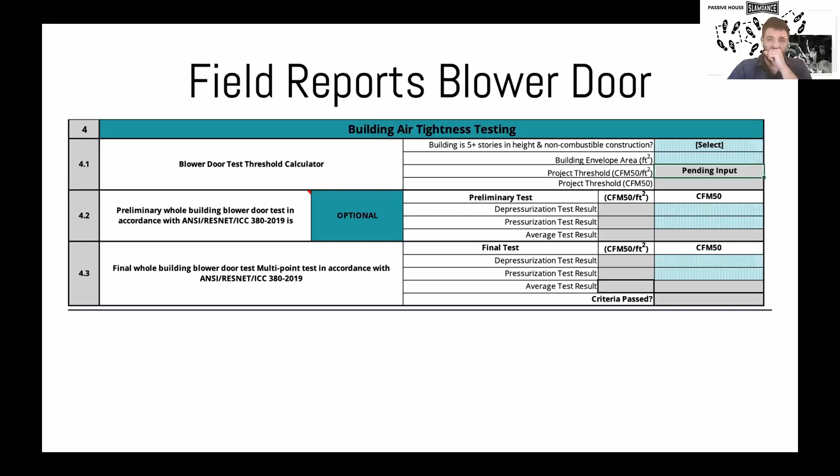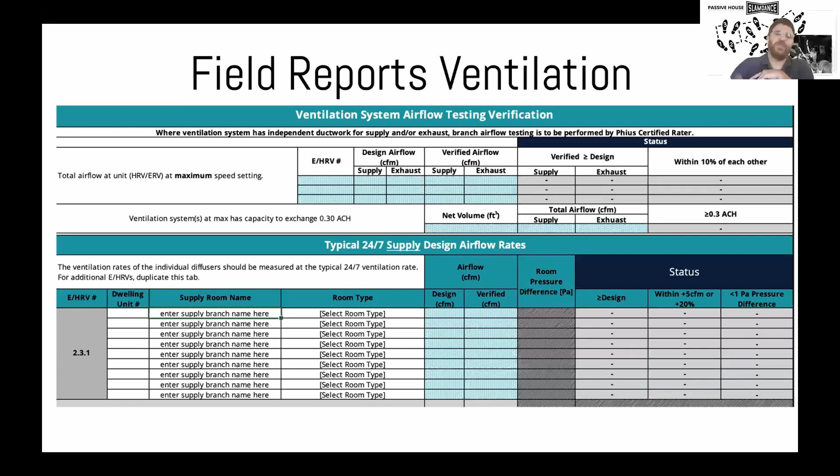And this is what the report from the ventilation system looks like. So I am reporting the design values, the verified values, the total values, and the difference between those. And as I was saying, there's a lot that goes into the balancing of the ventilation system. And that is all I have.

So the question that came up, Neil, was: if you're working with a potential client who's used to the HERS rating, and the commenter is saying there are some deficiencies within the HERS rating that are not associated within the passive house modeling tools, like hydrothermal flows in the ground that don't get accounted for in HERS in any way, how are you communicating that there are these potential deficiencies and that they need to watch out for that? I'll kick it to you, Neil, and then Shannon, maybe you can follow up.

I haven't run into that too much. Typically when I do a passive house project, the passive house modeler is communicating a lot with the client, and the HERS model is sort of just in the background, and not too many people are aware that it's even happening. So I haven't had to describe those deficiencies too much, but if they came up, I would mention it. I guess I would just rely on the passive house modeler to explain those things.

Everyone has a different opinion. I think it really is, where do you want to spend your money and where do you want to get your energy from? And do you want it to be on site? Because you can achieve source zero by buying renewable energy elsewhere and having a power purchase agreement over time to satisfy that requirement. Offsets are usually a last resort, but it's a great bridge between being able to make your own energy and having to buy your energy from somewhere else. And it also supports those making green energy in your area.